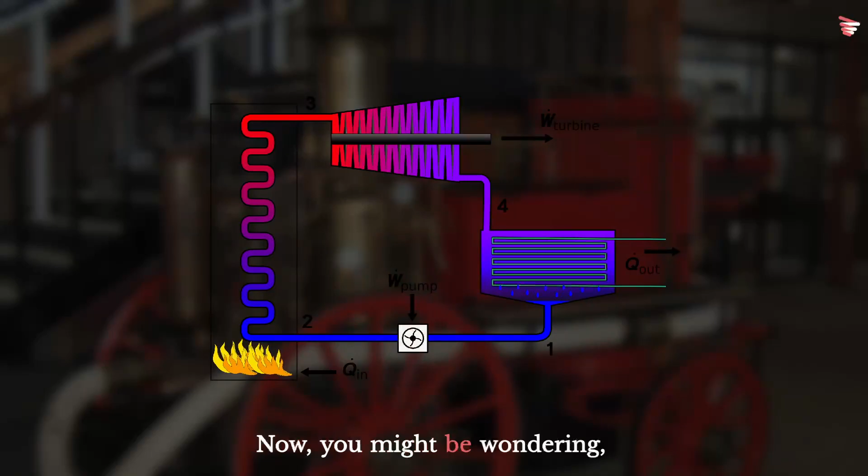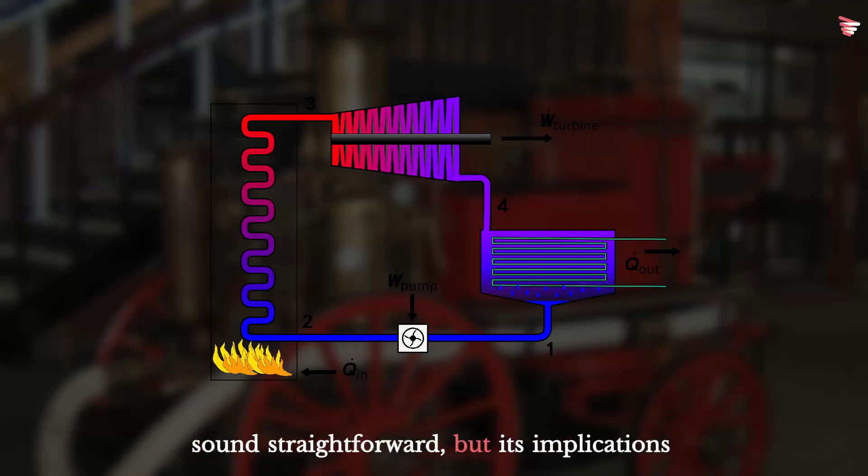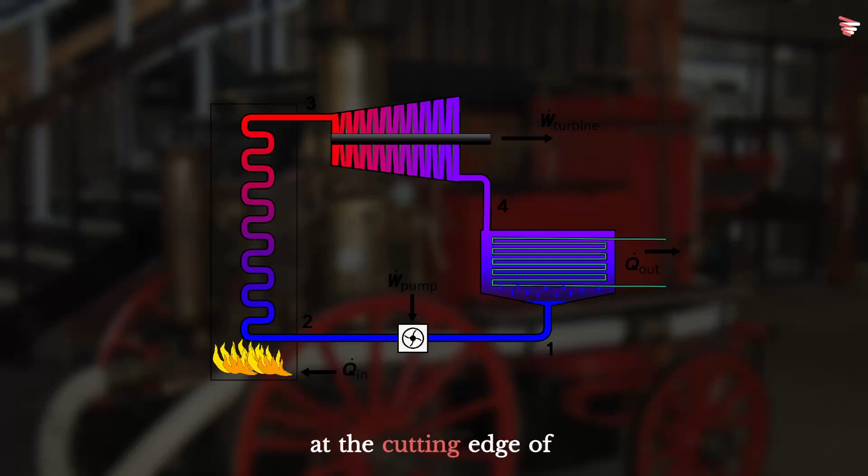Now you might be wondering, what exactly is a steam engine? At its core, it's a machine that converts the heat energy of steam into mechanical energy. This process might sound straightforward, but its implications were far-reaching. The ability to generate power without relying on human or animal muscle, wind or water flow was nothing short of revolutionary. It's quite remarkable to think that this technology, which seems almost quaint to us now, was once at the cutting edge of human innovation.

The story of the steam engine is not just one of technical innovation, but of human ingenuity and perseverance. It's a tale that spans centuries, from the earliest experiments with steam power to the complex machines that drove the industrial age. Throughout this video, we'll explore the evolution of the steam engine, its key inventors, and the profound impact it had on the world. We'll delve into the mechanics of how these engines work, the challenges faced in their development, and the legacy they've left behind. So let's embark on this journey through time and technology, and discover how the power of steam changed the world.

The adoption of the steam engine and the birth of the Industrial Revolution is a complex story of scientific, technological, and social change.

The concept of harnessing steam power dates back much further than many might expect. In fact, the earliest known rudimentary steam engine was the aeolipile, described by Hero of Alexandria, a Greek mathematician and engineer in the 1st century AD. This device, while fascinating, was more of a curiosity than a practical application of steam power. It consisted of a hollow sphere mounted on a stand, which would spin when water was boiled inside it, forcing steam out through two bent tubes on opposite sides.

It's quite remarkable to think that nearly 2 millennia passed before steam power began to be seriously explored for practical applications. The intervening centuries saw sporadic experiments and designs, but it wasn't until the late 17th and early 18th centuries that we see the true birth of the steam engine as we know it. This delay in development is a testament to the complexity of harnessing steam power effectively, as well as the specific economic and social conditions required to drive such innovation.

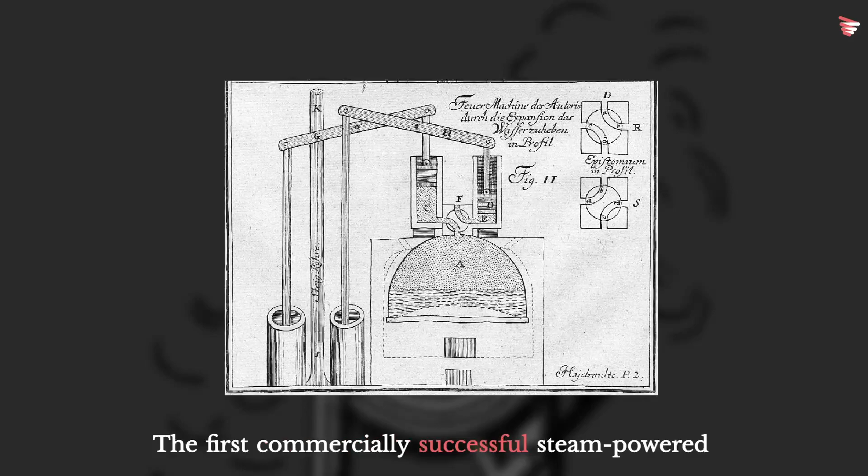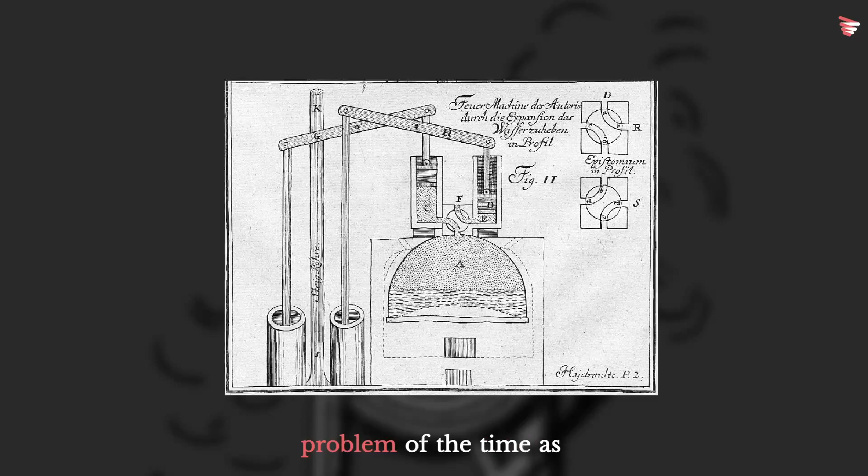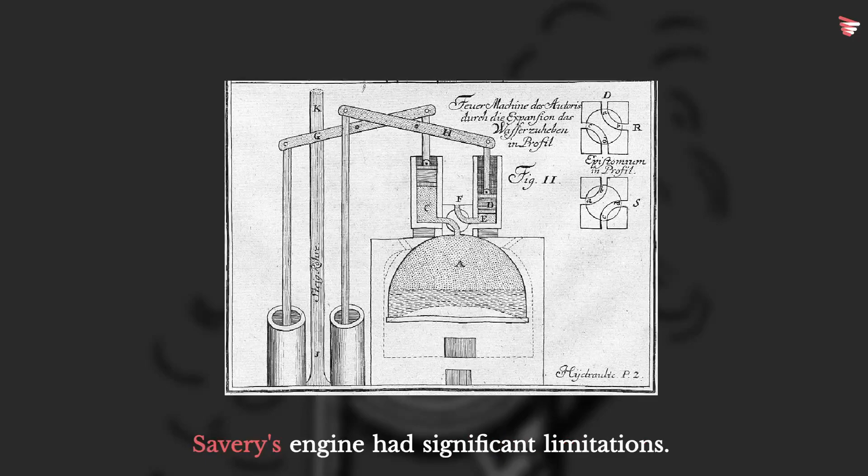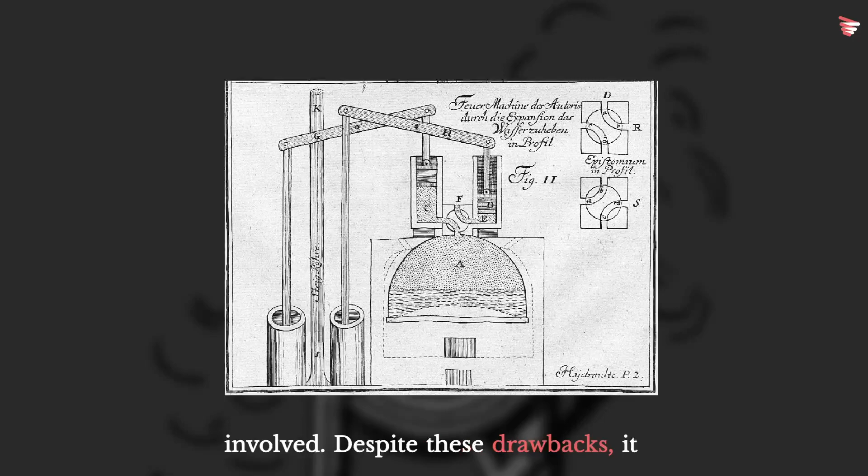The first commercially successful steam-powered device was a water pump, developed by Thomas Savery in 1698. Savery's engine was designed to pump water out of coal mines, a critical problem of the time as deeper mines were constantly flooding. His pump used the power of vacuum created by condensing steam to draw water up from the mines. While innovative, Savery's engine had significant limitations. It could only raise water by a limited height, and was prone to boiler explosions due to the high pressures involved. Despite these drawbacks, it represented a crucial step forward in the practical application of steam power.

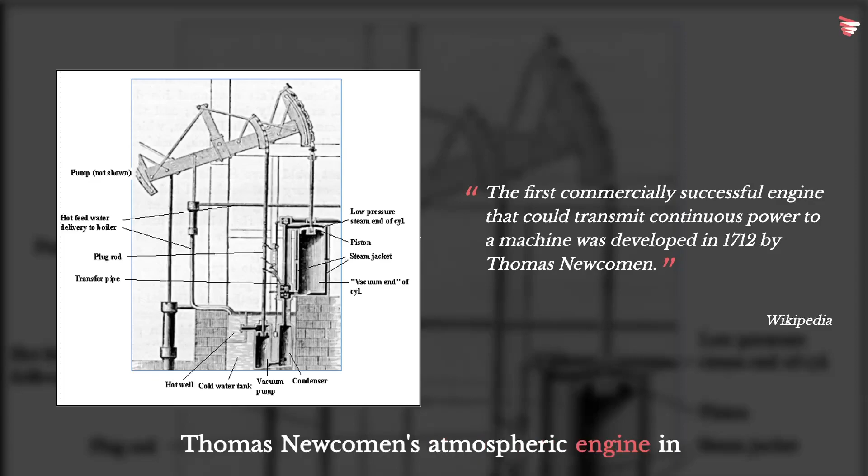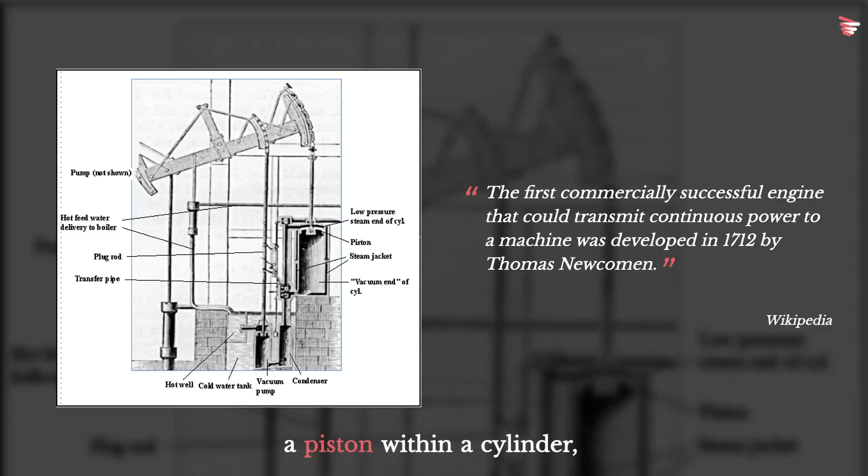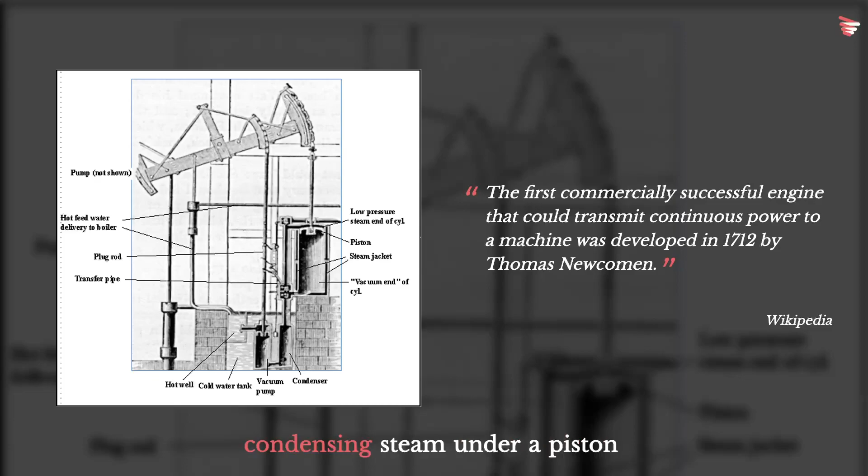The next major development in steam engine technology came with Thomas Newcomen's atmospheric engine in 1712. Newcomen's design was a significant improvement over Savery's, addressing many of its predecessors' limitations. The Newcomen engine used a piston within a cylinder, a design that would become fundamental to steam engines for centuries to come. This engine operated on the principle of creating a partial vacuum by condensing steam under a piston within a cylinder. Newcomen's engine was primarily used for pumping water out of mines, much like Savery's, but it could work at greater depths and was significantly safer.

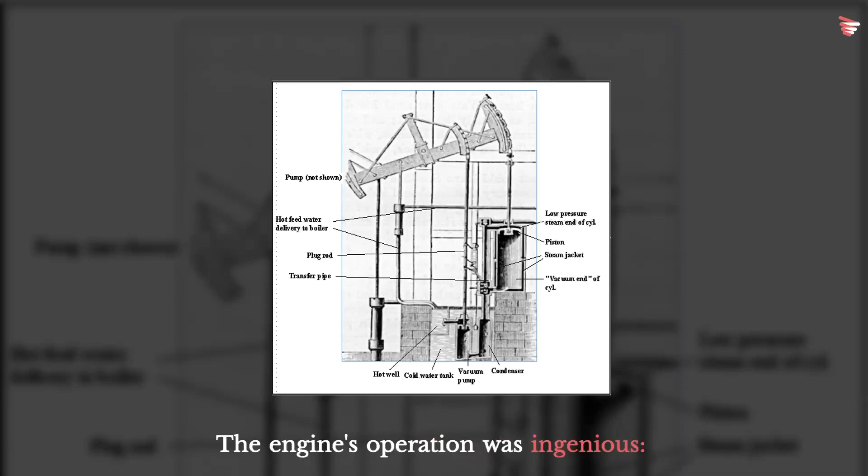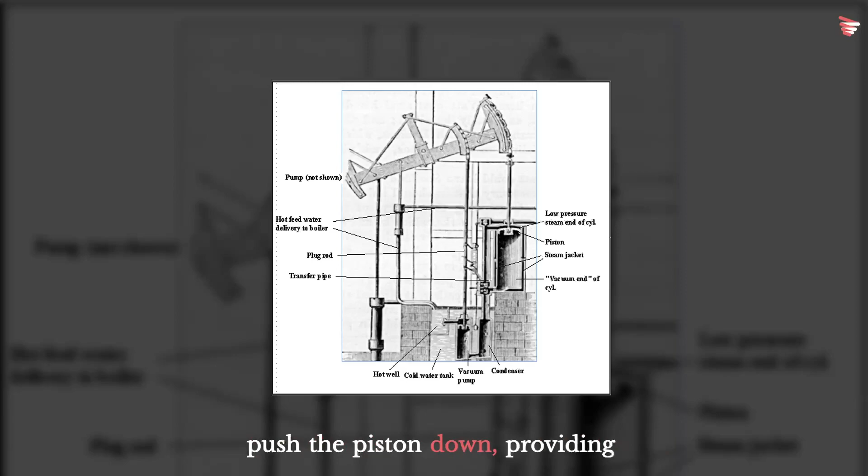The engine's operation was ingenious. Steam was introduced into the cylinder, then cold water was sprayed in, causing the steam to condense and create a vacuum. Atmospheric pressure would then push the piston down, providing the power stroke. The engine's efficiency was low by modern standards, but it was a vast improvement over what had come before.

Newcomen's engine, imperfect though it was, was the first really successful device for converting heat into work, and as such must be accounted one of the greatest inventions of all time.

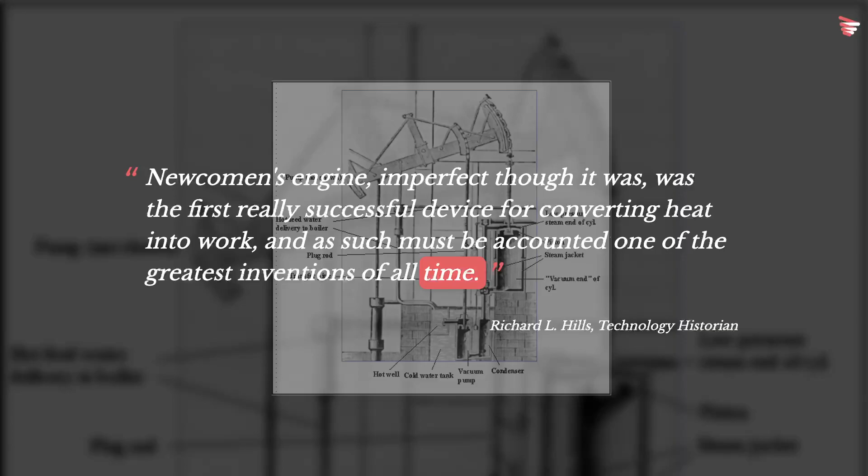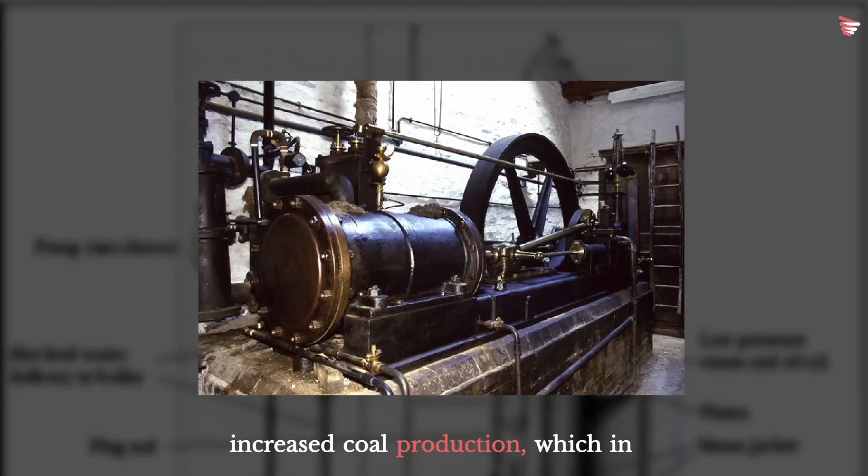The Newcomen engine saw widespread adoption, particularly in the mining industry. Its impact was significant, allowing for deeper mines and increased coal production, which in turn fueled further industrial development.

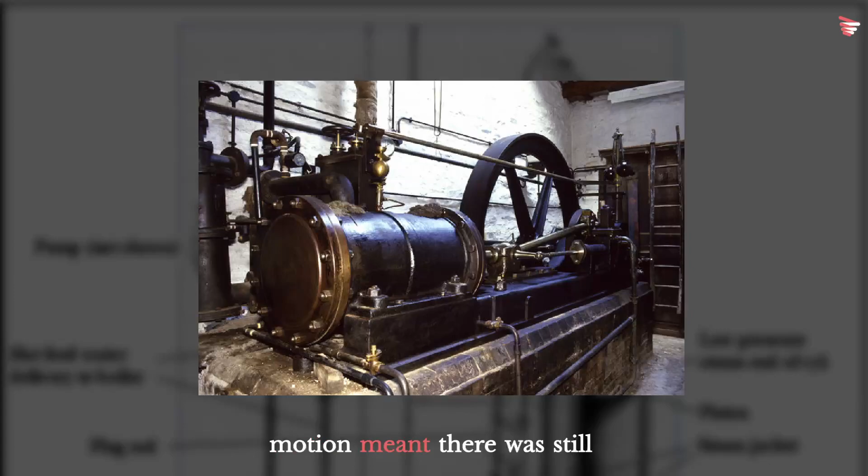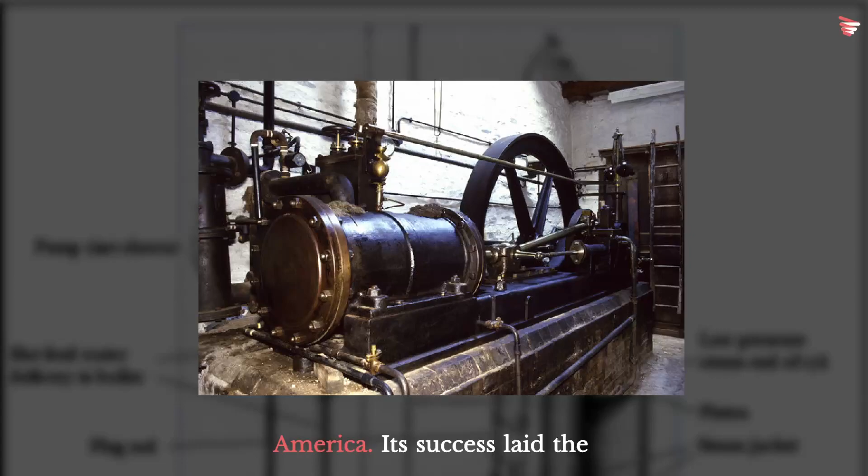However, its high fuel consumption and the limitation of only being able to provide reciprocating motion meant there was still room for improvement. Despite these limitations, the Newcomen engine remained in use for much of the 18th century, with hundreds built across Europe and North America. Its success laid the groundwork for the next wave of innovation in steam power, setting the stage for James Watt's revolutionary improvements.

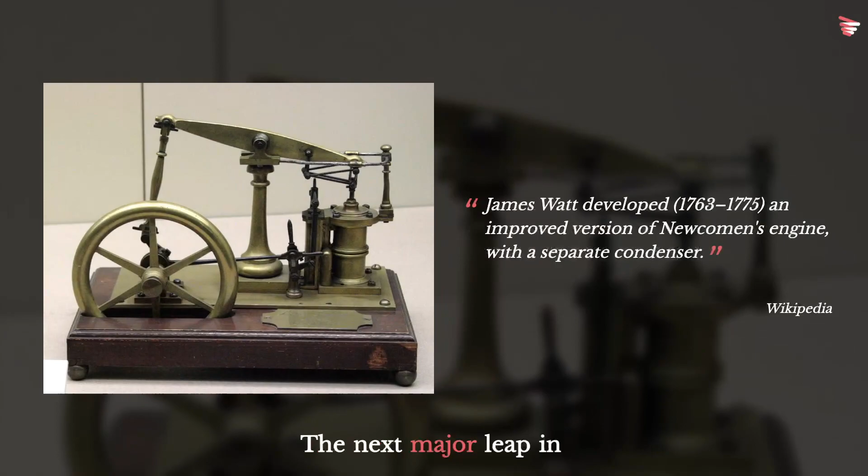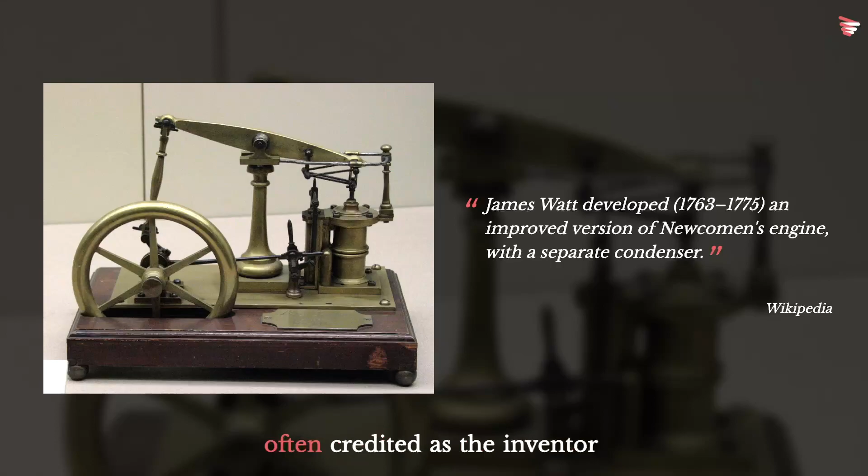The next major leap in steam engine technology came with the work of James Watt in the latter half of the 18th century. Watt's improvements to the Newcomen engine were so significant that he is often credited as the inventor of the modern steam engine.

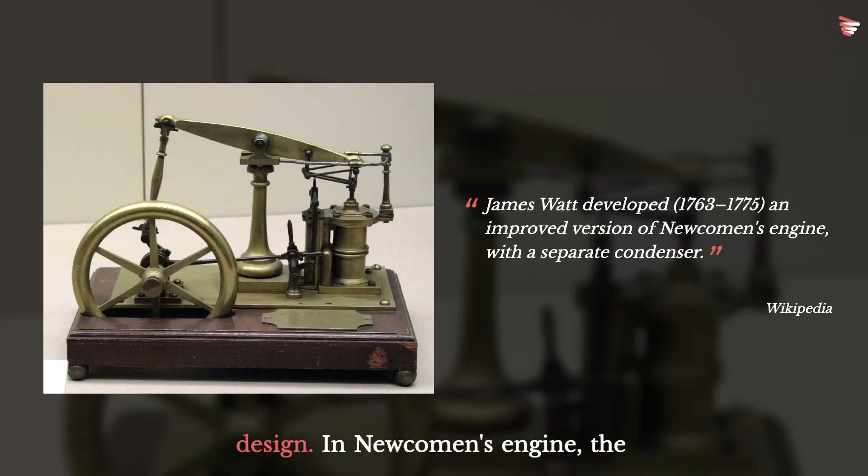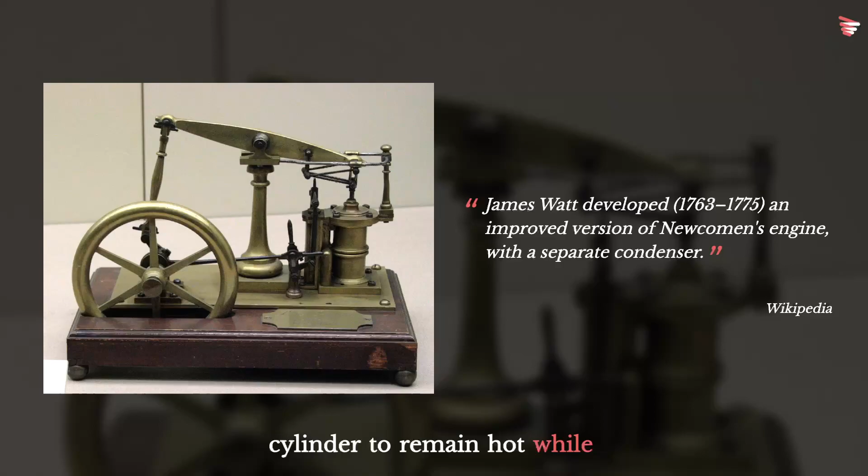His key innovation was the addition of a separate condenser, which addressed one of the main inefficiencies of the Newcomen design. In Newcomen's engine, the cylinder was alternately heated and cooled with each stroke, wasting a great deal of energy. Watt's separate condenser allowed the cylinder to remain hot while the steam was condensed in a separate chamber. This seemingly simple change had a profound impact on the engine's efficiency. Watt's design used about 75% less fuel than a similar-sized Newcomen engine.

But Watt didn't stop there. He continued to refine and improve his design, introducing the centrifugal governor for automatic speed control, the steam indicator for measuring steam pressure, and the parallel motion mechanism for converting reciprocating motion to rotary motion. These innovations made the steam engine more efficient, more controllable, and more versatile.

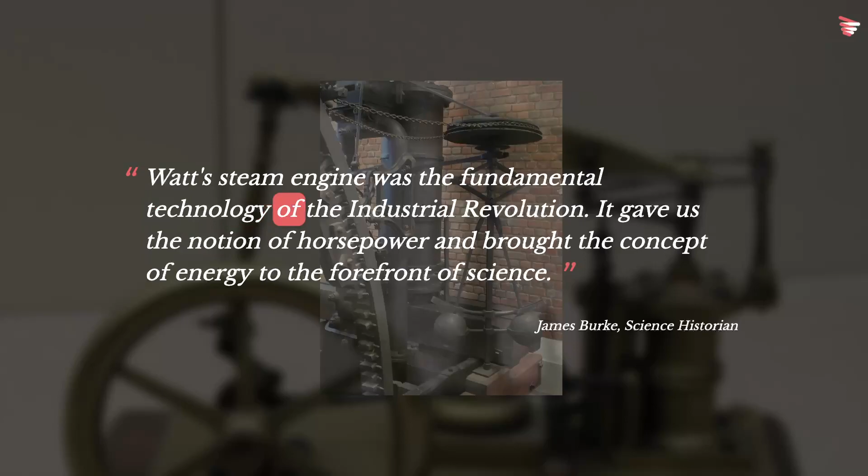Watt's steam engine was the fundamental technology of the Industrial Revolution. It gave us the notion of horsepower and brought the concept of energy to the forefront of science.

The impact of Watt's improved steam engine was immense. It was no longer confined to pumping water from mines. It could now power a wide variety of machinery. This versatility led to its adoption across numerous industries, from textiles to manufacturing, dramatically increasing productivity and driving the rapid industrialization of the late 18th and early 19th centuries.

Watt's steam engine became the powerhouse of the Industrial Revolution, transforming not just industry, but society as a whole. It's fascinating to consider how this one invention, born from the continuous refinement of earlier ideas, could have such a profound and lasting impact on the course of human history.

As we move into the 19th century, we see the steam engine evolve and diversify, finding new applications that would reshape the world. One of the most iconic and transformative of these was the steam locomotive. The development of steam-powered transportation began in the early 1800s, with pioneers like Richard Trevithick and George Stephenson leading the way. Stephenson's Locomotion No. 1, built in 1825 for the Stockton and Darlington Railway, is often considered the first steam locomotive used on a public rail line.

The impact of steam locomotives on society was profound. They revolutionized transportation, allowing for the rapid movement of goods and people over long distances. This had far-reaching effects on trade, urbanization, and even the concept of time itself, as railway timetables necessitated the standardization of time across regions.

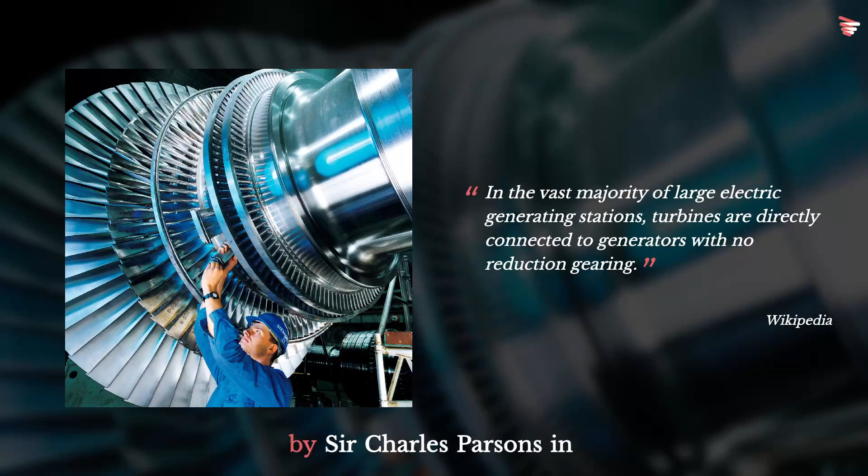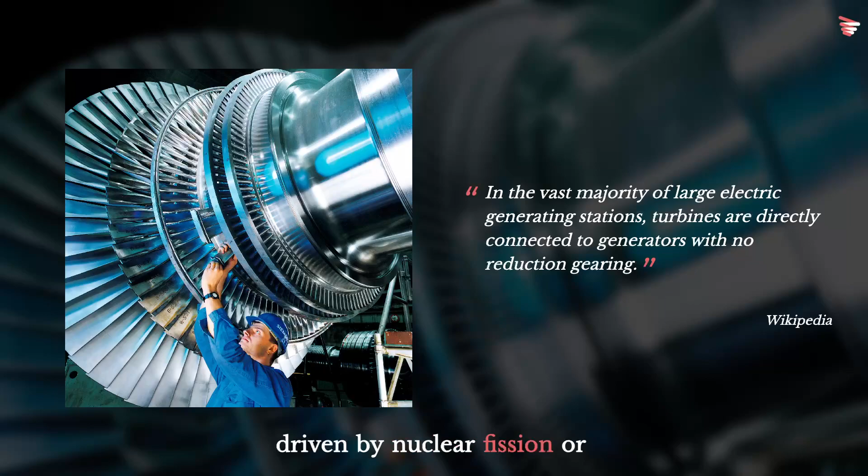As we approach the end of the 19th century and move into the 20th, we see the steam engine evolve once again with the development of the steam turbine. Invented by Sir Charles Parsons in 1884, the steam turbine offered greater efficiency and power output than reciprocating steam engines. This technology quickly found applications in electricity generation and marine propulsion, areas where it remains important to this day. Indeed, while we may not think of it often, steam turbines driven by nuclear fission or the burning of fossil fuels still generate the majority of the world's electricity.

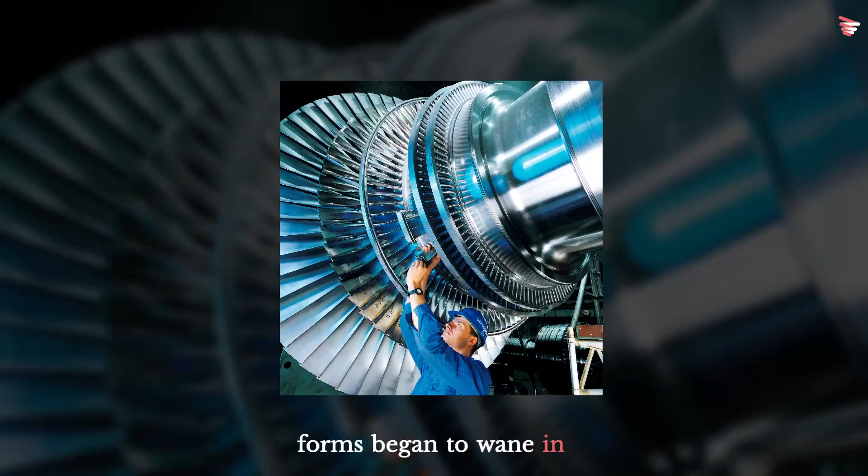However, the dominance of the steam engine in its traditional forms began to wane in the early 20th century. The development of internal combustion engines and electric motors provided alternatives that were often more suitable for many applications. Diesel locomotives began to replace steam on the railways, while petrol and diesel engines took over road transportation. In factories, electric motors offered more flexibility and cleanliness than steam engines.

Despite this decline in many areas, the principles developed during the age of steam continue to be applied in modern engineering. The steam engine may be seen as the exemplar of the Industrial Revolution, but its principles live on in the turbines that generate much of our power today. The age of steam has not ended. It has merely been transformed.

The legacy of the steam engine extends far beyond the realm of technology. It played a crucial role in shaping the modern world, driving industrialization, urbanization, and globalization. The steam engine changed not just how we work, but how we live, travel, and interact with the world around us. Its development spurred advancements in thermodynamics, materials science, and mechanical engineering.

The story of the steam engine is, in many ways, the story of the modern world, a tale of innovation, progress, and transformation. As we face new challenges in energy and technology today, the history of the steam engine serves as a powerful reminder of humanity's capacity for innovation and the profound impact that technological advancements can have on society.